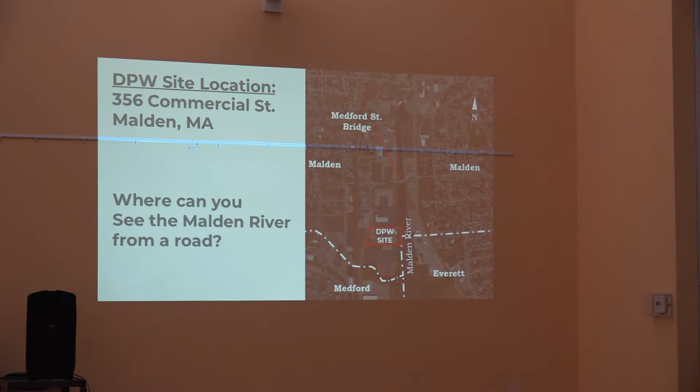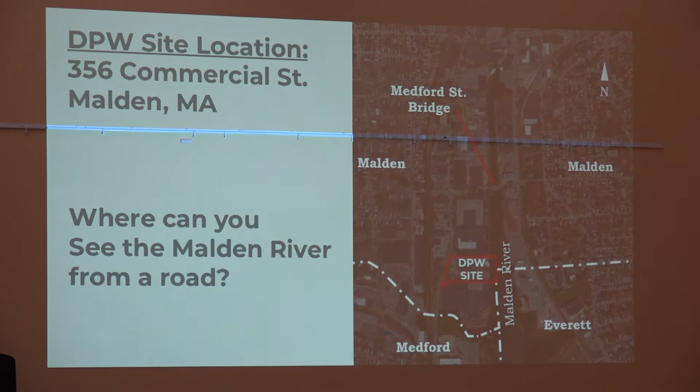Okay, so the reason why you can't see the river very well, you can tell from this close-up view, is because there are so many buildings right alongside the river and so many parking lots all along it. So the one place where you can see the Malden River from the road is the Medford Street Bridge.

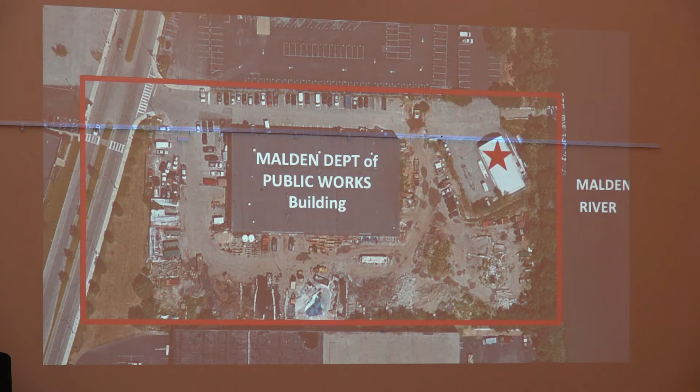Zooming in now on the DPW site, you can see Commercial Street on the left and Malden River on the right. There's a very large building filled with many big trucks and big equipment, and a big yard necessary for all that work. You can also see the star on the boathouse. If you're not familiar, this is where Malden High School has its rowing team.

Now I'm just going to do a quick overview of the concept design and our outreach process. The goal for this meeting, public meeting number 2, is to get feedback on concept designs. We're looking forward to having 2 more public meetings. The third is scheduled for April, and there'll be one later on. We're working towards a concept design report, which in the long run will allow us to work towards a shovel-ready design in the summer and fall of 2020.

During this time period, we're looking forward to lots of different events along the river, so we're asking you to stay tuned through our media. Malden Riverworks is a new website, and the Mystic River Watershed Association has a second one, which also includes Malden River. And very reliable, of course, is the Friends of the Malden River, which has a Facebook page.

So I'd just like to introduce you to the people who worked hard to win the prize, which is from the Leventhal Center for Advanced Urbanism.

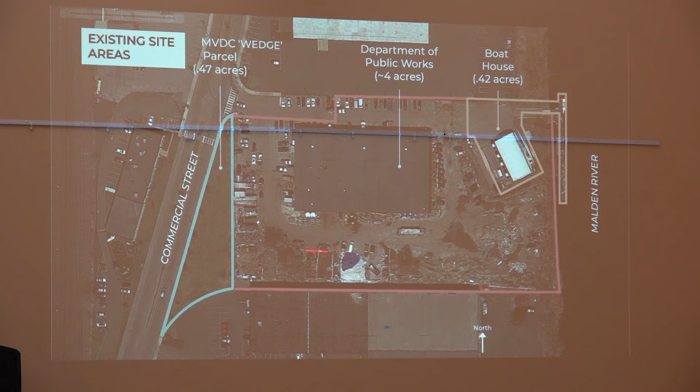The third part of the site is this wedge of land, which has a different landowner. Currently that's just sort of a strip of grass with some trees on it, separating the DPW from the sidewalk along Commercial Street.

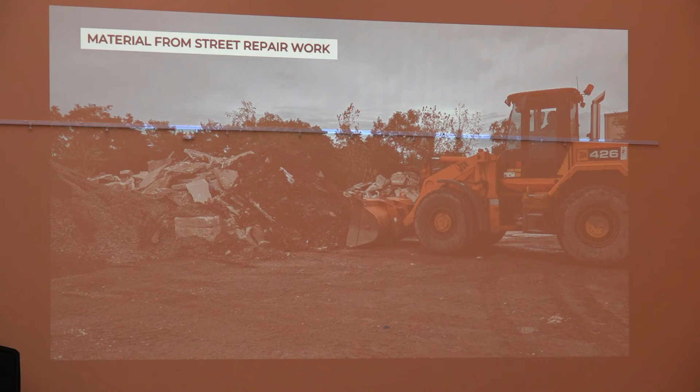Next you see some of the images from the yard, pictures we've taken from the yard. This is them doing some street repair work, or taking materials from street repair. The road salt storage and equipment storage happens there.

We heard a lot since then that people are really excited about the opportunity to get to Malden River. There aren't any public boat launches along the river right now in Malden, not too many opportunities to do this sort of thing. So in this project, we're looking for ways to really increase the opportunities for people to get to the river and use it like this.

Okay, now we're going to talk about what is happening on the DPW yard. We made this map to document all of the activities that happen there to keep the city running. This is based on what we learned from Director Bobby Knox, and our field visits where we went to measure, take photographs, and just observe what was happening.

There are basically three main types of space in the yard. Car parking, mainly along the north edge of the site, for DPW employees and anyone visiting the site to drop off materials or go into the office for business. There's materials and equipment storage, which happens all around the perimeter of the yard. You have impounded vehicles, material from street repair, some more parking for trash contractors.

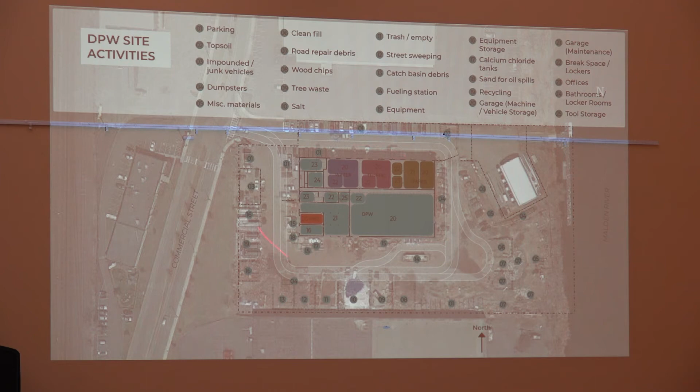You see the road salt, street sweeping debris, recycling, and impounded vehicles again over here. There's also circulation space around the building. So when larger vehicles like the salt trucks come for deliveries, or trucks to haul out waste, they circulate all the way around the building like this. Other vehicles come in, and let's say for fuel, go out this way. So there's a lot of truck activity happening around the building. There are actually also 18 garage door entrances to the building itself, so you can imagine it gets very active there at some times.

Then we did a map of the ways the DPW yard could be organized differently, based on ideas from Bobby and our observations, to bring safe public access from the street and free up space by the river. One idea is that they're no longer going to have junk vehicles or impounded vehicles on the site, so we could free up some space here and here, which is currently used for that type of storage. A big idea is that the salt will go into a covered salt storage structure in this corner that isn't currently utilized.

That frees up some space that could be where we move the street repair material and debris storage into this zone, and this area can generally be cleaned up to create this kind of waterfront access zone. Something else we were looking at is whether there's a way to clarify the circulation on the site, so we don't have truck traffic and people trying to access the river going through the same areas.

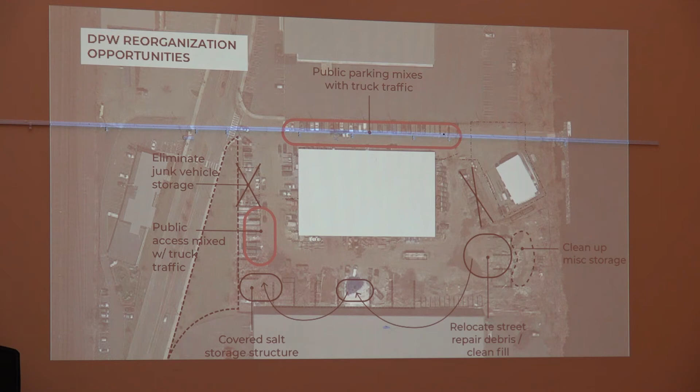That led us to one of our first ideas here, a new traffic strategy for the site, where we start to look at circulation basically, and an idea of utilizing this parcel of land around the street to create a new curb cut. This creates a protected parking area near the front of the site, near Commercial Street, and frees up the rest of the space for all the DPW activities, keeping these two things separate so the driving patterns can be a little more clear to visitors on the site.

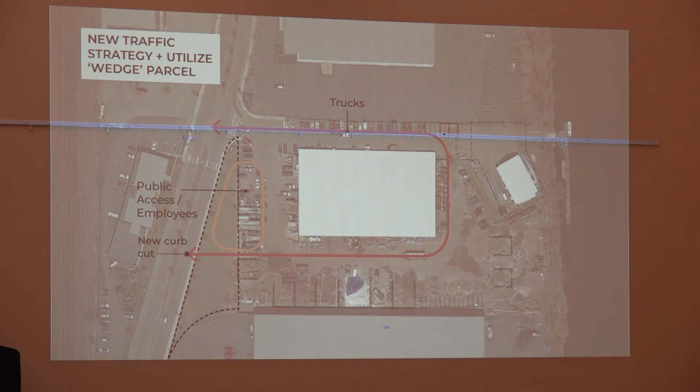Most of the parcels along the Malden River right now drain directly to the river without any treatment at all. So what we want to do here at the DPW site is set an example for what can be done throughout the river, and start to clean the stormwater before it goes in.

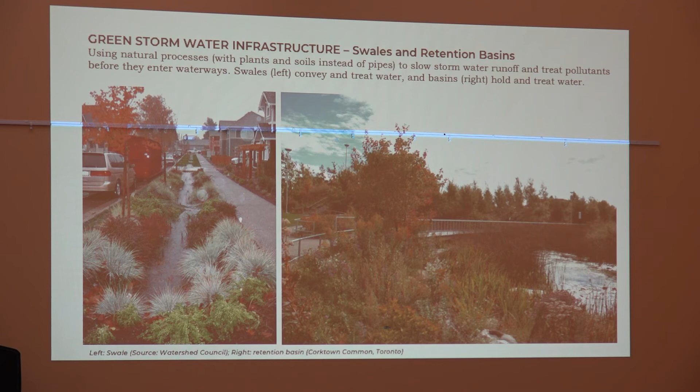The plans for green stormwater infrastructure are really designed to resemble and work like natural marshes or wetlands that also naturally experience periodic flooding. So the goal is that the green infrastructure both helps with resilience and also creates opportunities to incorporate nature on the site.

Another thing we're working on in relation to this project is the Malden River Greenway Plan. Many of you might already be familiar with this plan, spearheaded by the Mystic River Watershed Association last year, for a continuous Malden River Greenway along the river. This project at the DPW would build the first piece of the Greenway on this part of the river, south of the Medford Street Bridge on the western side.

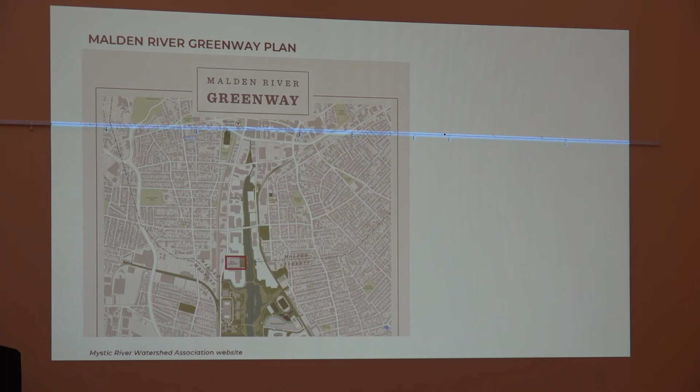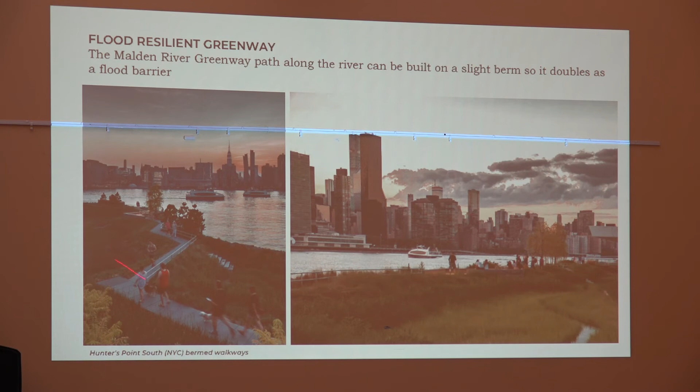We also see this as an opportunity to address climate resilience and flooding. We know that towards the end of the century, there's a higher probability of flooding on the Malden River from sea level rise. While fixing the Amelia Earhart Dam is a big part of solving that problem, we can also do things locally to protect the river from flooding. So an idea we're looking at is to think of the Malden River Greenway as a flood-resilient greenway, using the pathway to double as a flood barrier by raising it a few feet from the current ground level, like in these pictures. Just mounting it up, and that mound can be planted with grasses.

It eventually flows into the river. In terms of public access, we're trying to create a continuous loop, because we know the ultimate plan is to create a full Malden River Greenway, but today that doesn't exist. So we have to plan for this piece of the Greenway to exist without its neighbors to the north and south. The idea is to create two points of access, one at the north side of the site and one at the south, so you can create a continuous loop from here to here, coming in and back out either way.

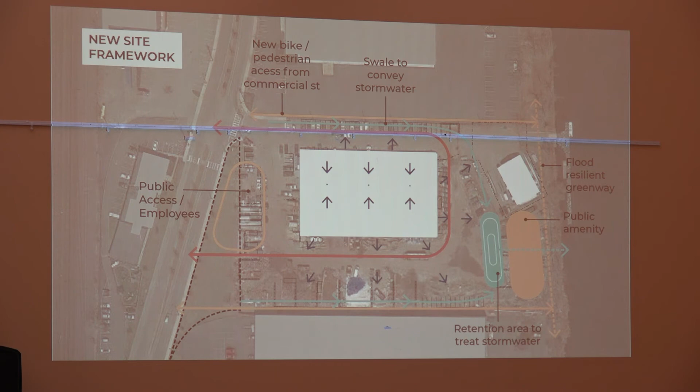And what this does is it frees up a space right here for a new type of public amenity, and that's really going to be the focus of the conversation tonight: to talk about what is the look, the feel, characteristics, and types of activities that you would want to see in that type of space.

This plan shows this idea in the context of the whole Malden River, and how the basic framework we develop at the DPW could be applied to all the other parcels along the river, with a continuous flood-resilient Malden River Greenway connecting a series of small park-like spaces like the one we propose at the DPW. The basic ideas for green stormwater infrastructure around the edges of each parcel, and one public access pathway from the street, would apply here, helping to clean the river by treating runoff from all the impervious parking lots that currently surround the river.

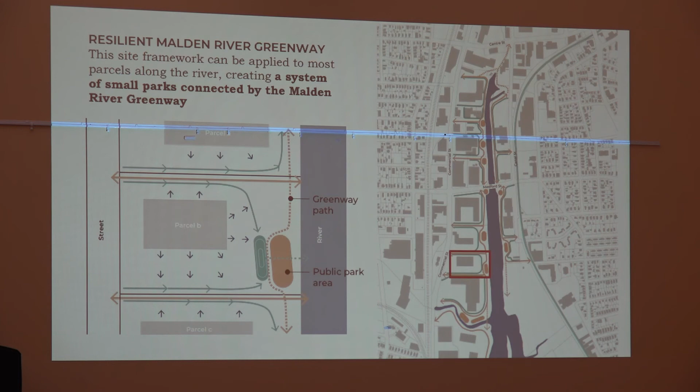This would also create multiple points of access from the street to bring people to the river. On that point of public access and awareness of the river, which we heard about from many of you in the surveys and table discussions, we really want to think about ways we can encourage people to come to the river and invite them in. This is an example of signage from a riverfront project in Newark, meant to help announce the entrance to the river from the street. It also becomes a place for gathering, as you can see in these images.

So it tells you where you are, and it also becomes a way of creating a sense of place.

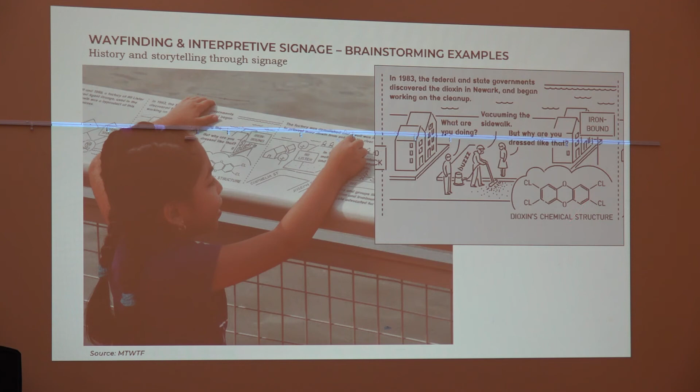Signage along these pathways from Commercial Street to the river can also be an opportunity for storytelling. We know there's a really deep history to the Malden River and how it's changed from a once natural system to an industrial one, and now it has a new future. Along these pathways there could almost be a gallery of interpretive signage that talks about that history, like the project in Newark, where there's an illustration of their past industrial waterfront and how that's changing to public open space today.

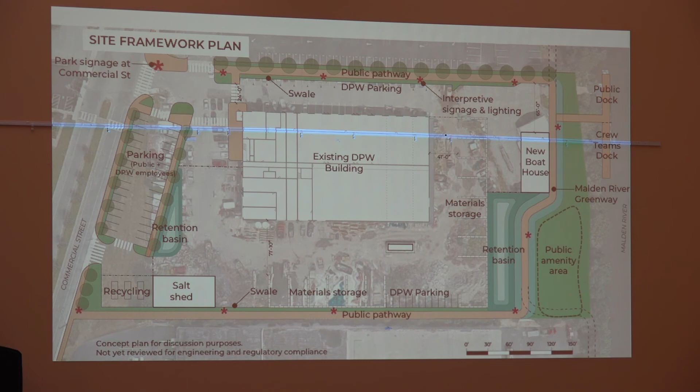So now we're going to talk about three initial design concepts for that public amenity space. We're basically proposing these concepts as a way to start a conversation about what you want to see there - it's not meant as a proposal for what we think it should be, but more so something you can use to bounce ideas off of. Based on what we've been hearing, we came up with three different ideas: one which is more flexible, so we call it the flexible concept; the second, which is a river view; and the third, probably the most specific, which we're calling the enjoy nature concept. I'll go into a little detail now.

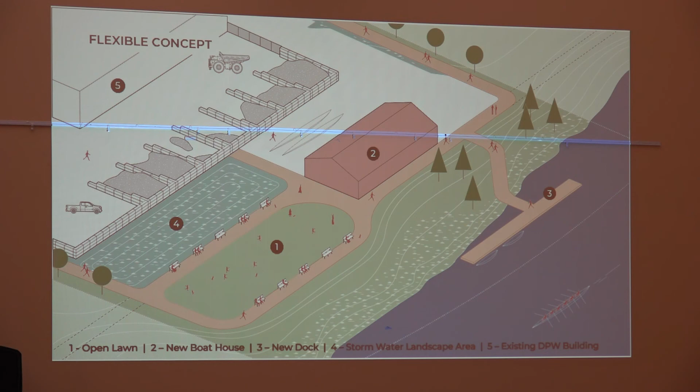All right, so this is a bird's eye view of the flexible concept. Basically what we mean is that this could be used for many different kinds of activities. What you see here is a flat, open lawn - the red figures you see here are scale figures of people. The Malden River Greenway would be coming in through here. All of the different proposals have the boathouse and the idea of a new dock that would be both for rowing events but also for public access here. In the lawn, the flat lawn could be used for many different types of activities and events. I'll show some examples from projects you might be familiar with.

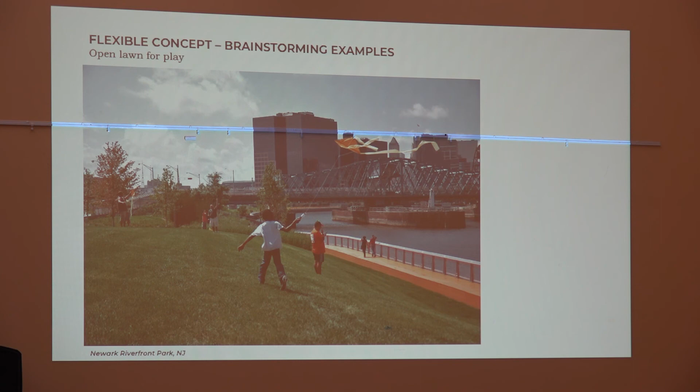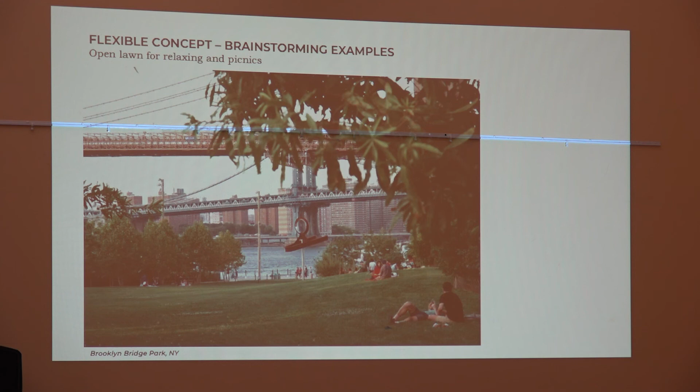The second concept is called the river view concept. In this case, we're really trying to strike a balance between a desire to be around nature, but also preserving views to the waterfront so we can see what's happening there, especially given what we've been hearing from the boating community and comments about a performance space that have come up through the surveys and outreach.

So the idea is that you could create a sort of grass amphitheater situation here, facing towards the river. There could be a zone out in front used for performance, and at times when there's not a performance or event, you could just watch what's happening on the river.

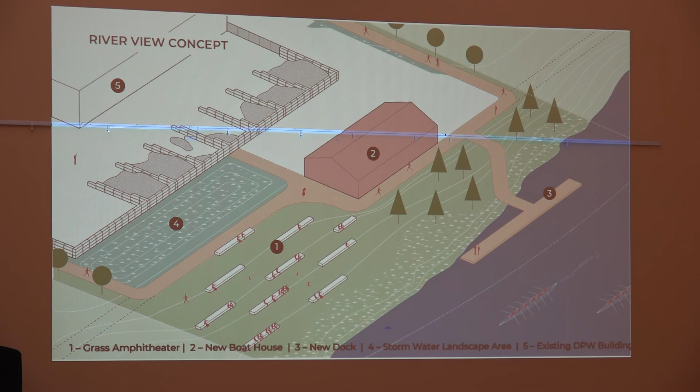The idea is that in the future, the river itself will be a lot more activated by public boating, or if there's a regatta event or something like that, you could come to the site and watch all of that happening. So we have some examples of other types of grass amphitheaters.

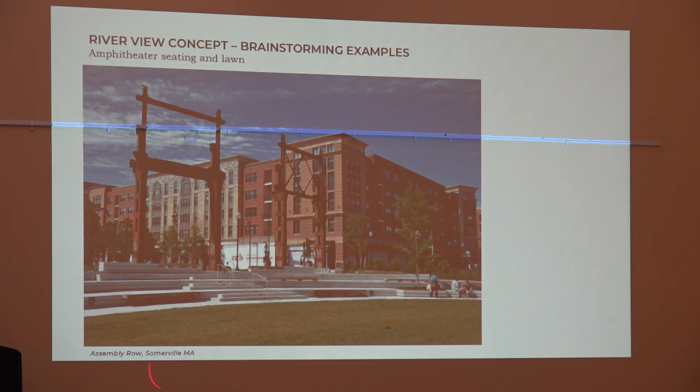And this is a nearby example from Assembly Row, where you have a larger flat lawn area and some step seating, so you can have performances and events near the riverfront as well.

The third concept is the most specific, in the sense that it has less space for gathering in larger groups. It's really more for individuals and smaller groups to circulate through the site, go walking or jogging on the trail, and to be close to nature.

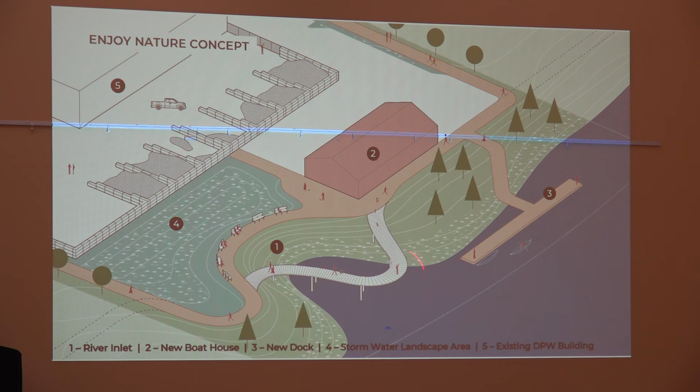So the idea is basically that you bring the river into the site by carving away at the shoreline here, creating a new marshland zone with a boardwalk that walks out into it, so you could walk out over the water and through all the plants and really be surrounded by the river ecosystem.

A lot of this draws from ideas about resilience for flooding. There's a concept called room for the river, which a lot of you are probably familiar with—the idea that over time, as the Malden River has become industrialized, it has been straightened, channelized, and a lot of space has been taken away from it. So if you see here, this is the train line—I'll draw your attention to it.

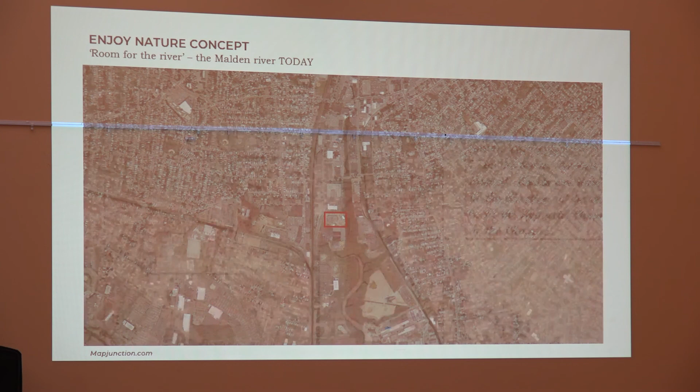This is the orange line, this is the Northern Strand Trail, and this is the DPW site in red. So this is what the Malden River looks like today. Back in 1878, you can see how it used to have a meander to it—all of the space between those two train lines was given to the river, or was naturally part of it, whereas today it's just this very skinny, straight, narrow thing.

So even though this is a very small gesture in the enjoy nature concept, the idea is that we could start incrementally to get back to a river that's more like this, to give it more room to flood and to behave like a river.

Some images of what that could look like: this is in West Stockbridge, Massachusetts, a boardwalk going over a similar marshland landscape so you can really get close to the water and look at fish and plants. An example from River's Edge, very close by, shows the idea that you could also have a trail under the tree canopy, with benches placed within the trees as well.

Okay, so that's an overview of the three concepts. We're going to open it up to conversation, and Ramon is going to introduce that. But before we start, I can take any questions you have about these concepts, about the site, the process, or anything at all.